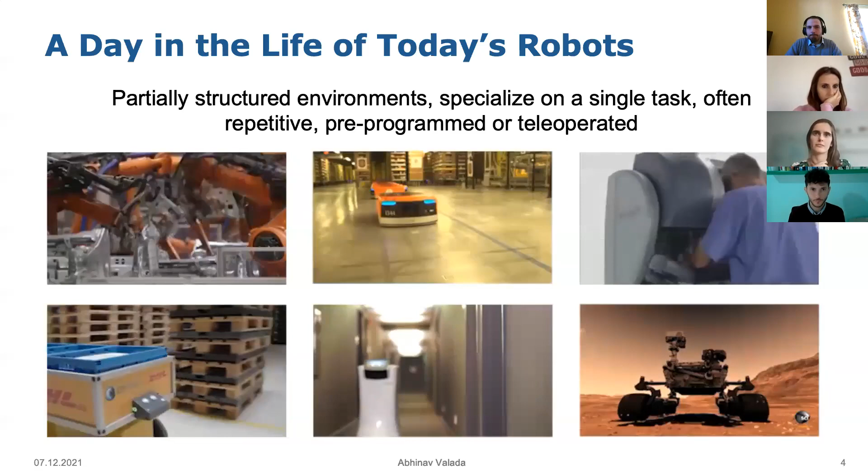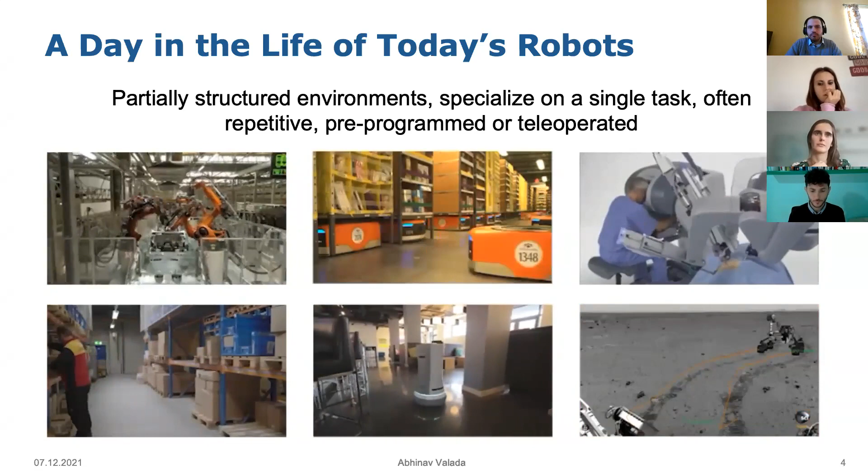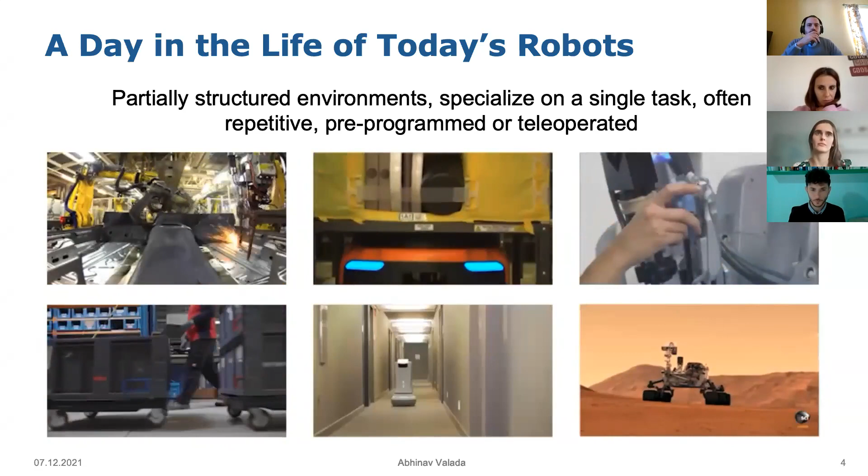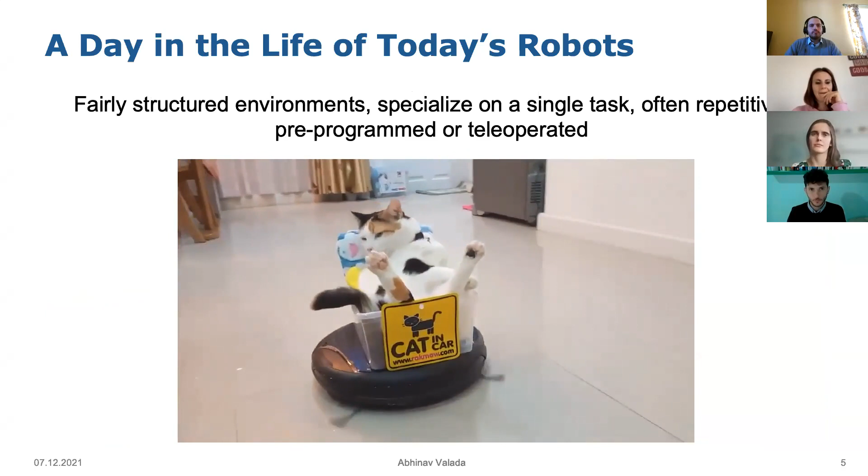So let's first look at a very brief discussion on why learning in general is important. Today we have more robots now than ever in our world. However, most of these robots are confined to fairly constrained environments, such as industrial spaces where they perform repetitive tasks, or more recently in households where they bring us food and so on. If we take more extreme complex environments, such as medical surgery or space exploration, these robots are often only pre-programmed, or trained to perform specific instructions. And of course, we all have our favorite cleaning robots in our homes, which are sometimes, I'm sure, like the self-driving vehicles of our pets.

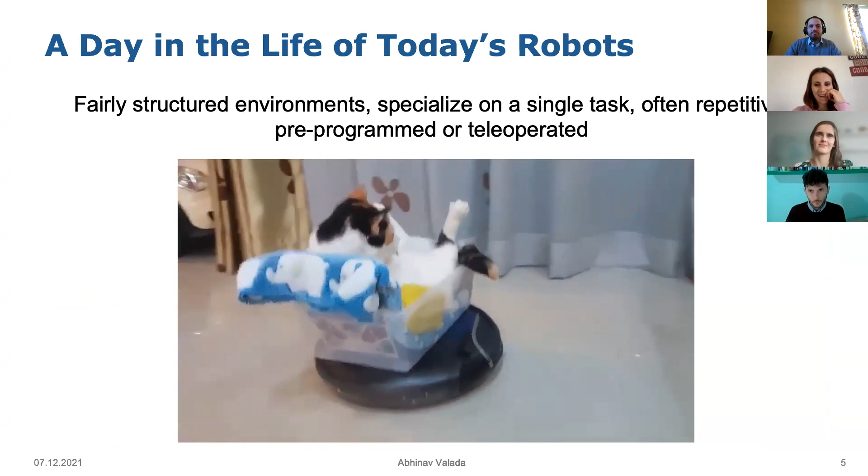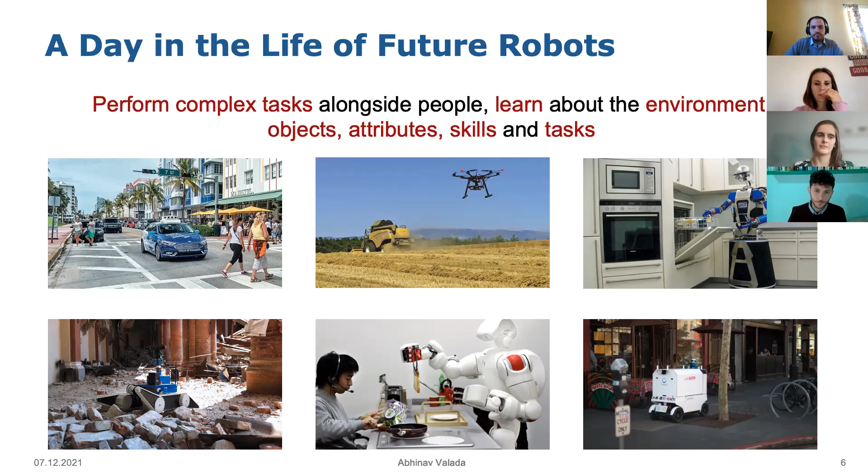These are not the only ways in which we all envision robots to be used. What we envision in the future is robots performing far more complex tasks. As you can see here, these environments are no longer contrived spaces. We want the next generation of robots to perform far more complex tasks in these unknown and unstructured environments, as well as in shared spaces with humans and while collaborating with humans. In order to achieve reliable operation, we must enable robots to learn interactively and adapt to unexpected situations.

Okay, so let's start with interactive learning. Learning to solve complex tasks from visual observations is a dominant challenge for real-world robot learning. In order to learn new skills, people often rely on some kind of prior knowledge or an expert teacher that guides the learning process. Here we can see that skills such as walking, writing, or playing some kind of sports, or even driving a car, are all learned under the supervision of a teacher initially.

So in this work, we wanted to see if we can enable robots, or autonomous agents, to learn from feedback received from a human teacher.

The most common way to use prior knowledge is learning from demonstration. Here the goal is that an expert collects a database of perfect demonstrations, and then the policy is trained to regress the data in the dataset, and then deployed on the robot afterwards.

With learning from demonstration, we've seen tremendous success, but it has limitations. One is that we need to collect lengthy demonstrations, which is expensive. It's also not clear a priori how many demonstrations are needed to train a policy.

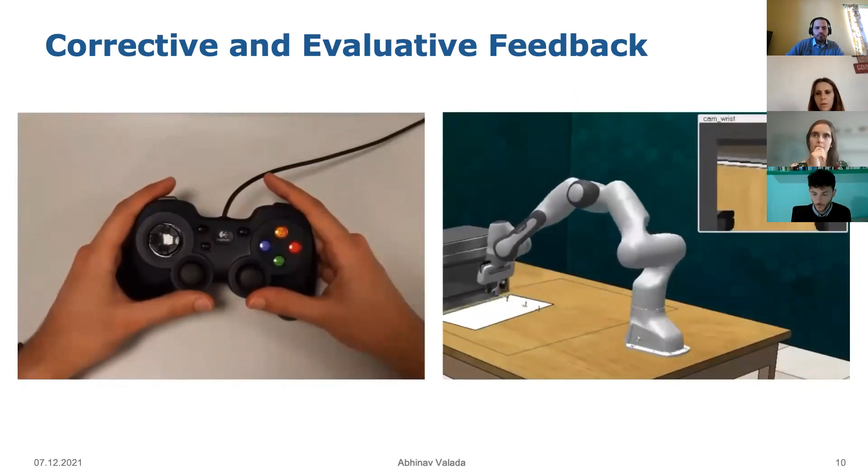So how does this work? The policy takes an RGB image from a wrist-mounted camera as input, which is fed through 3 convolutional layers. The visual embedding output is concatenated with the joint and gripper positions of the robot, then fed to an LSTM cell that accounts for the sequential nature of the problem. Finally, the output is a 6-dimensional end effector pose plus a 1-dimensional gripper action.

Our data collection consists of several steps. While the robot interacts with the environment, we continuously update the policy, and the update loop runs in parallel in a separate asynchronous thread.

First, a batch of labeled and potentially correct trajectories are sampled from the replay buffer, as you can see here. The goal is to increase the probability of the policy picking the right action, which we achieve using a maximum likelihood objective.

To evaluate this approach, we performed user studies with a group of 10 participants, both men and women aged 25 to 32. Each participant was given 5 minutes to familiarize themselves with the control interface and had to teleoperate the robot during the experiment.

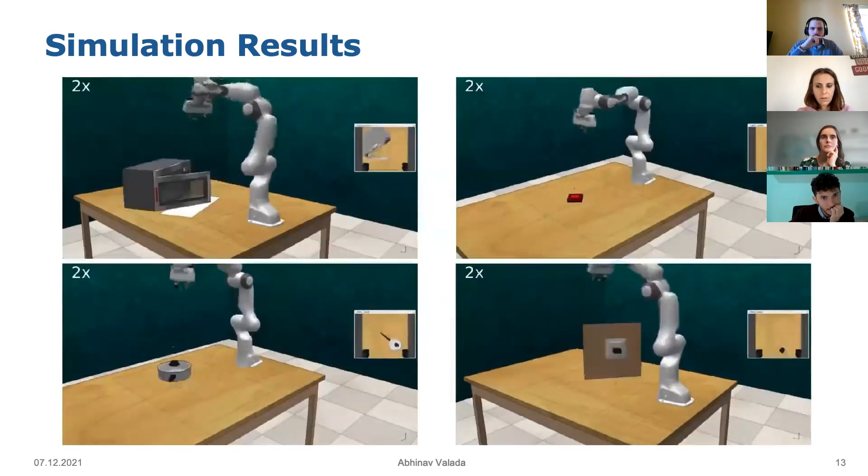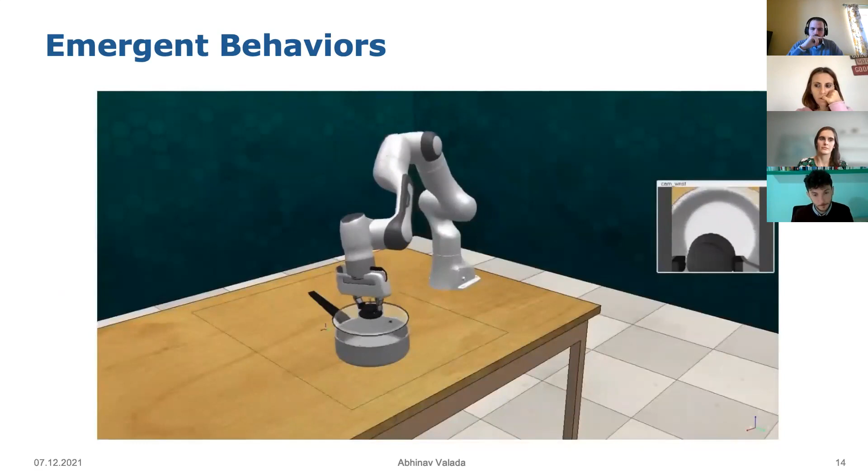The interactive framework also allows the policy to learn complex emergent behaviors. Here we see the robot understand that the grasping attempt is not successful on the first try, so it reopens the gripper and attempts a second try. Learning such self-adjusting behavior would not be possible if we just used perfect demonstrations.

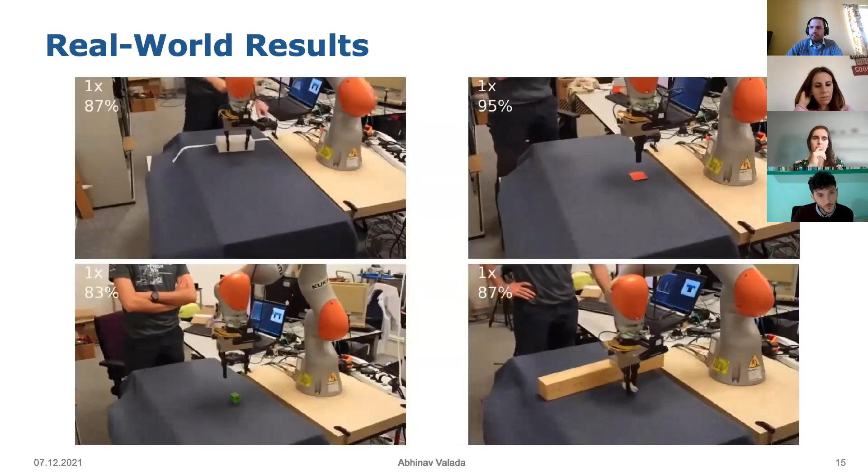We also demonstrated this capability on real robots, using only the human teacher's feedback, no instrumentation of the environment. We show that Ceiling is able to achieve really high success rates in less than 1 hour of training. Here you can also see that the policy is more robust to external disturbances that were not present during training.

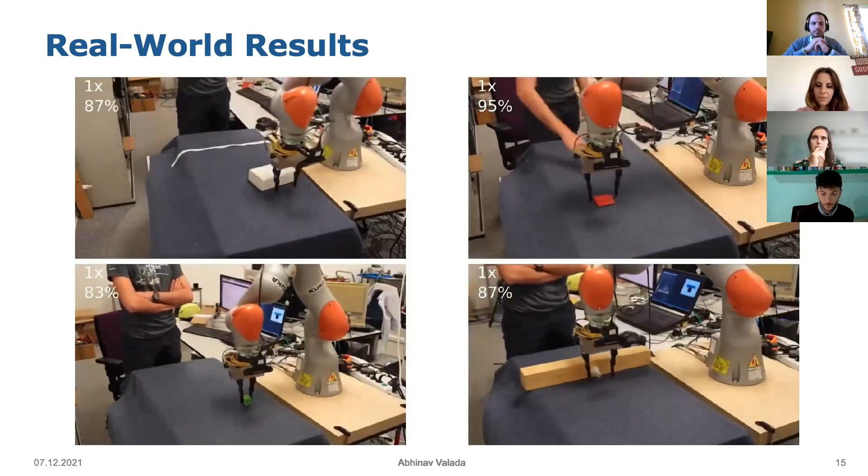So what we saw until now is basically static manipulation. Of course, we want to scale to many different real world tasks, so we also need mobile manipulation. Mobile manipulation remains a critical challenge for autonomous systems in a wide range of scenarios, from industry to home assistant services. Currently, this task is usually separated into a pure navigation task followed by a static manipulation task. This is slow, and it also requires base poses that can solve the whole manipulation task at one go.

One way of doing this is using inverse reachability maps. For many tasks this is not really possible, as they require use of both the base and the arm joints of the robot. This includes tasks such as the PR2 here opening the door, for example. More generally, the use of the base and the arm enables a large increase in efficiency over sequential and static manipulation tasks.

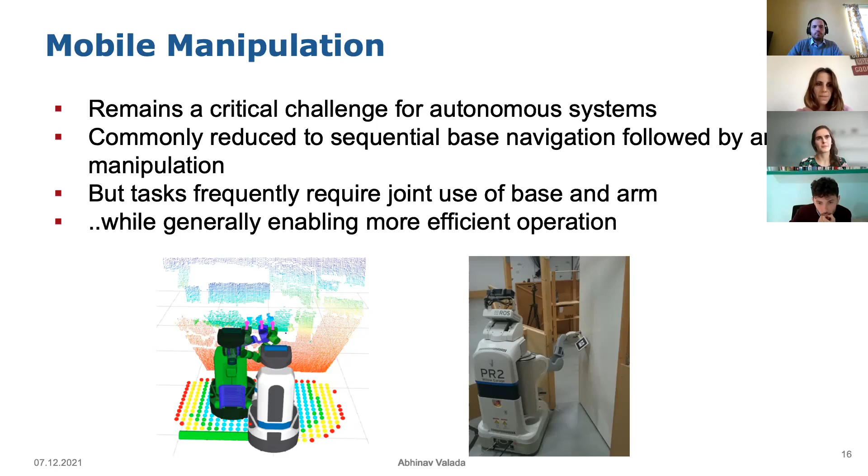So what makes this really challenging? The first thing we are confronted with is a much larger configuration space consisting of the base and the manipulator. Planning or sampling in such high dimensional spaces is very expensive, and found solutions can be far from optimal. Approaches that plan in the joint space may also require expert knowledge to transfer task constraints to the configuration space.

Moreover, mobile manipulators acting outside of controlled environments are frequently confronted by dynamic scenes as well as dynamic obstacles, requiring really fast reaction times and adjustment to changing circumstances. The last thing is that these tasks are typically very long horizon and require sparse rewards, which makes them difficult to learn in an end-to-end manner.

To address these challenges, we recently proposed an approach that decomposes and modularizes the mobile manipulation task. Here we assume the task to be given by an arbitrary end effector planner, shown in green, which generates the motions for the end effector in the task space. We introduce a reinforcement learning agent to control the base of the mobile manipulator, aiming to find base motions that ensure the end effector motions are kinematically feasible.

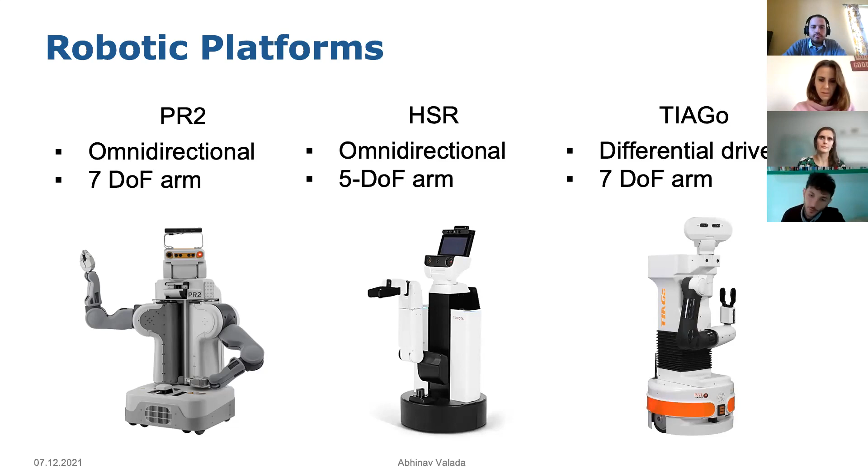So there's a wide range of applicability for this. It ranges across different robotic platforms without any expert adaptations needed for the type of platform you want to use. We demonstrate this on 3 different robotic platforms with very different kinematic abilities: the PR2, the HSR, and the Tiago robot. As you can see, each of these has different degrees of freedom, different types of mobile bases, different amounts of manipulators, and so on.

So we implement an analytical environment which integrates the system step by step to generate the robot poses, which allows for fast training. So we optimize our objective with current model-free reinforcement learning methods. We primarily use soft actor critic, which is shown to be robust to noise.

So then at test time, we evaluate the zero-shot generalization capabilities of our agent. We construct unseen tasks from both linear dynamical systems used for training, as well as motions based on human demonstrations from our previous work.

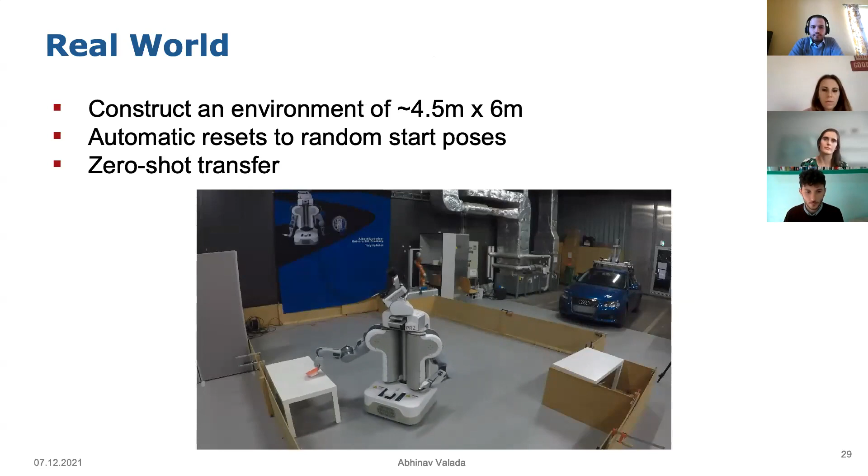Initially, this is a bit old right now with the PR2. So we automatically generate random start poses, including very challenging poses. And the agent achieves zero-shot transfer to the real world, which further indicates the robustness and the capabilities of our approach.

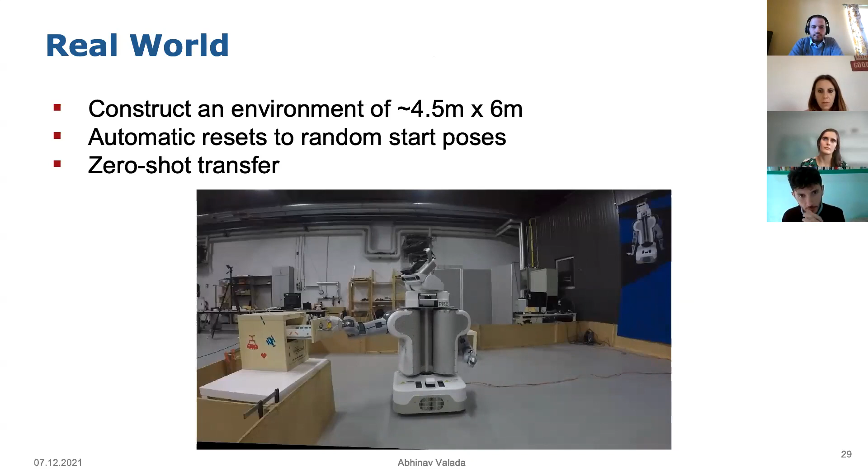So quantitatively, the results in the real world closely align to the performance of the simulation, with only a minor drop here in the performance.

All right, so this is some more recent work after our published paper. So here we were able to demonstrate that we can transform an arbitrary end effector motion into a mobile manipulation task in our first work. But now we want our mobile manipulators to be broadly impactful, and they need to leave the lab.

So we extended our approach that I just presented before to incorporate sensor information from the environment. So our main aim here is to generalize to unseen and complex environments, such as using 2D obstacle maps, and these obstacle maps can be constructed with any sensor, such as LiDARs or any depth sensor. And this gives us fast inference and good generalization to unseen environments.

So we also want to avoid obstacles. Furthermore, this can require large movements of the base. And as such, we allow the agent to control the velocity of the end effector motions.

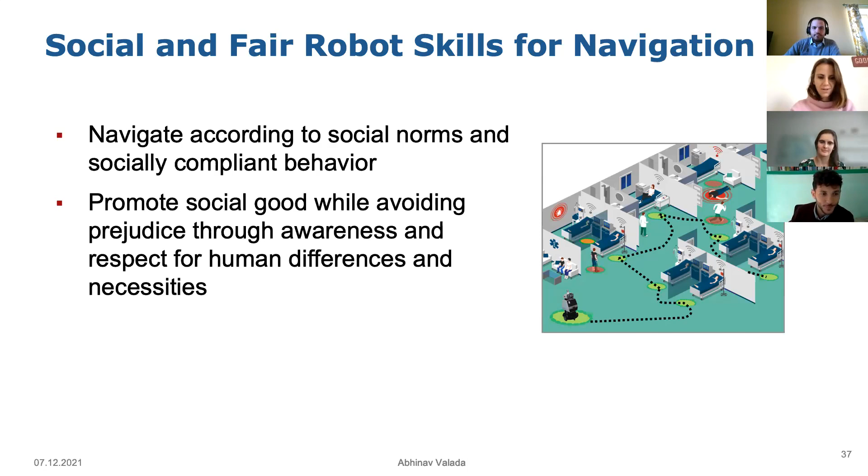With this in mind, we proposed a framework with two different strategies, which we call learning and relearning. In the first, the learning stage, the robot incorporates social context during navigation, so it can navigate in a socially compliant manner. In the second stage, called relearning, we use relearning to diminish any bias in the planned paths from the initial navigation model.

In the interest of time, I'm going to skip these details. We can basically do this with inverse reinforcement learning, and this allows us to capture the navigation behavior of surrounding humans in a very accurate manner.

The last thing I want to briefly talk about is the framework for responsible robotics. Very recently, we proposed the first large survey on how we can develop responsible learning robots. In this, we show a categorization of different ways to achieve responsible robotics using learning, tackling bias at the data level or model level, which can be in the pre-processing stage, during learning, as well as in the post-processing stage.

I'd like to thank you for the attention, and I would also like to thank my group. The work I have presented today is mostly due to their hard work. Thank you, and I would be happy to take any questions you may have.